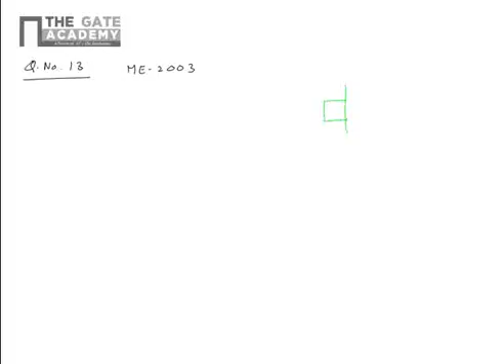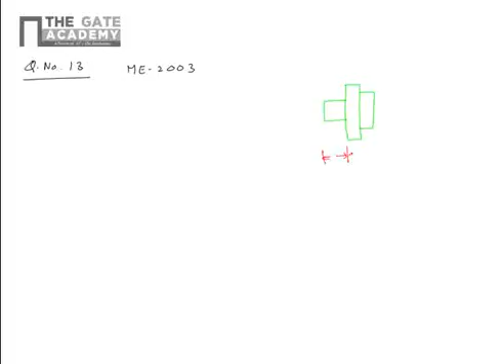A part is shown in the figure. He has given one diagram. So this is a diagram, it's like a coupling, looks like a coupling, with Q, W, R.

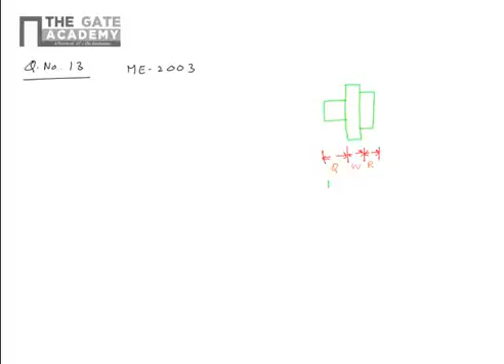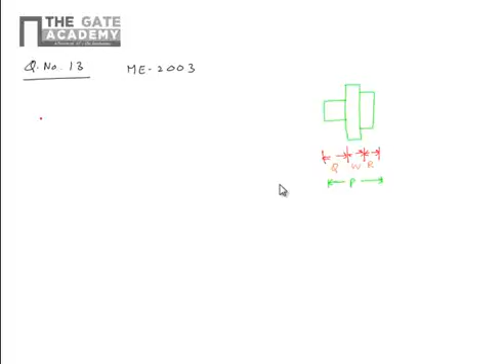This is P. So he has given P equal to 35 plus or minus 0.08 mm, Q equal to 12 plus or minus 0.02 mm, R equal to 13 plus 0.04 minus 0.02.

With 100% confidence, the resultant dimension W will have the specification. So we need to calculate the W dimension. So how do we get it?

First, maximum limit P max equal to 35.08. P minimum equal to 34.92.

So if you subtract minimum values of Q and R from P max, you will get maximum value of W, right? Subtract... suppose 35 is one thing.

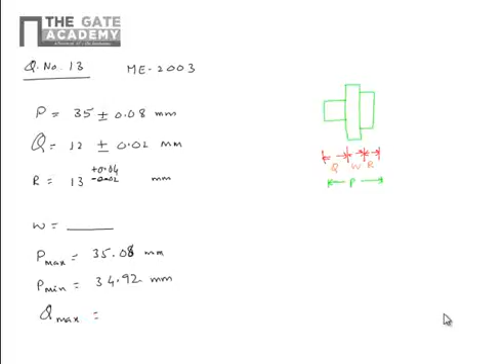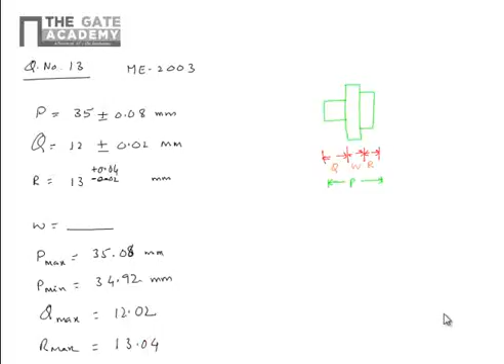Similarly, Q max, R max. So W max equal to P max minus Q max plus R max.

Similarly, W minimum equal to Q minimum, R minimum. So if you simplify this, you will get the option which satisfies 9.99 plus or minus 0.03. Answer is option A.

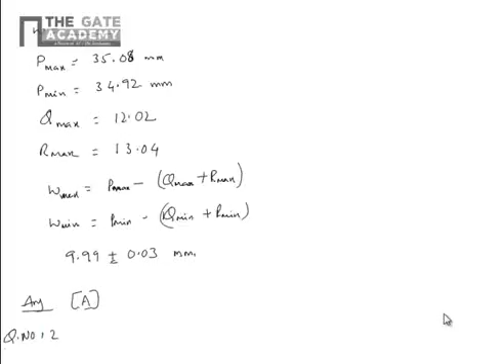Similarly, there is another problem on taper measurement. In 2010 they asked, question number 2, ME 2010. He has given a taper hole inspected using the CMM with a probe of 2 mm diameter at a height of 10 mm from the ground.

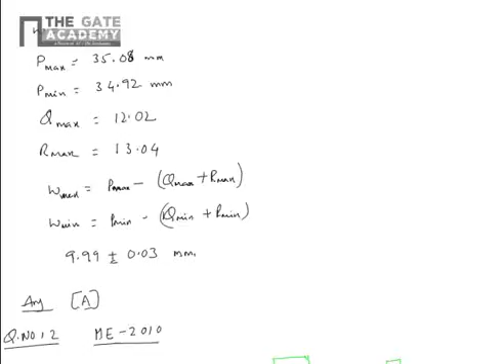From the bottom, 5 points are touched and a diameter of circle is obtained as 20 mm, and similarly 40 mm diameter at a height of 40 mm. The given problem is a taper hole, so it's a symmetrical taper. This is height z equal to 0, z equal to 20, z equal to 40.

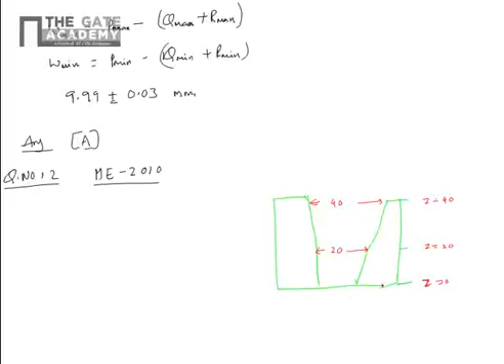So here diameter is 20, and here diameter is 40. What is the diameter at z equal to 0? That is the problem, so we need to calculate this one.

To get that, from similarity of triangles, we can calculate this way. I will draw it somewhat bigger so it's visible. This is what is the value of this? Similarly we can calculate this one. First theta, this is also theta.

This equals 40 minus 20 by 2, so that is 10. So first calculate theta, tan theta equal to 10 by adjacent side which is 20. So theta equal to tan inverse of 10 by 20.

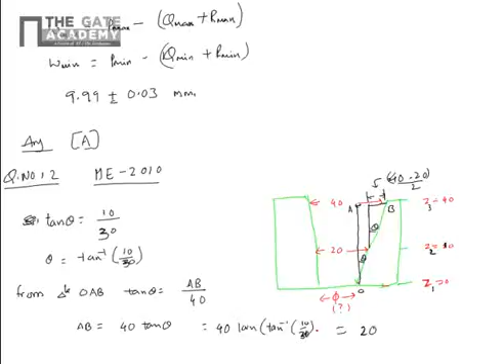Small correction, here z1 is 10, z1, z2, z3, so z2 is 10, not 20. So our formula will change, giving 30. So this value is 40 by 3, that is AB.

So if you want to calculate the diameter at Z, 40 minus 2 into 40 by 3 equals 40 by 3, that is equal to 13.3 mm. So diameter at the bottom is 13.3 mm.

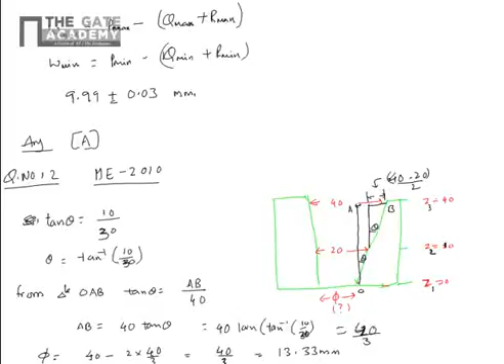So it's simple, you don't need to remember any formula, just use trigonometric functions and you can solve the problem. It's a 2 marks question, anybody can solve this. Next, screw thread measurement, the last topic.

In screw thread, the major diameter (maximum diameter) and minor diameter (minimum diameter) can be easily measured with normal vernier calipers and similar tools. But if you want to measure the effective diameter, you have to use different methods.

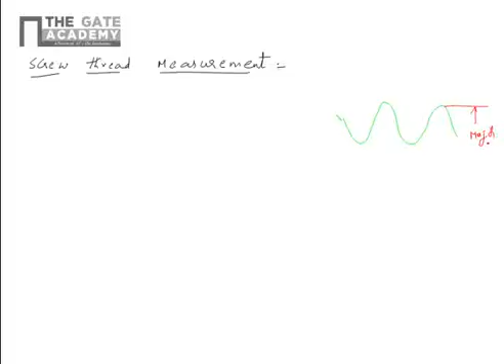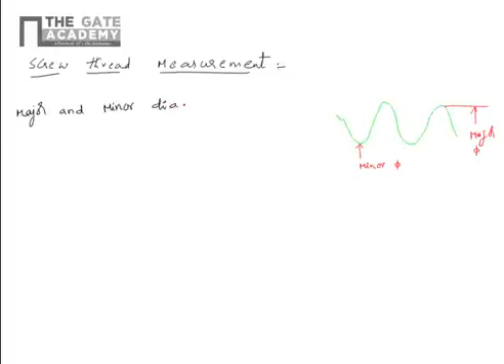So major diameter, this one is minor diameter. Major and minor you can easily measure using a bench micrometer and floating carriage micrometer. Major and minor diameters are measured using a bench micrometer or floating carriage micrometer.

Pitch of the screw thread is measured using a screw pitch gauge, tool maker's microscope, or optical projector. Pitch is the distance between two successive points in a thread. So pitch of screw thread is measured using screw pitch gauge, tool maker's microscope, any of this, or optical projector.

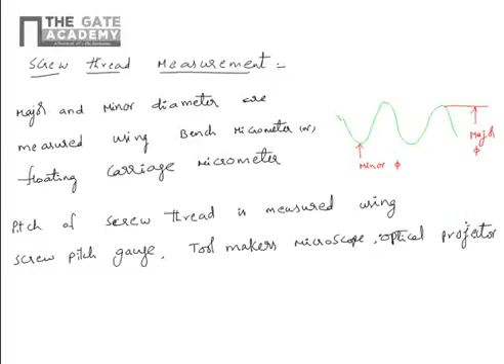Next, effective diameter. What is effective diameter? We know major diameter is the diameter measured at the addendum, and minor diameter is the diameter measured at the dedendum. So what is effective diameter? This is important: effective diameter is an imaginary diameter at which the thickness of the thread is equal to the gap between two threads.

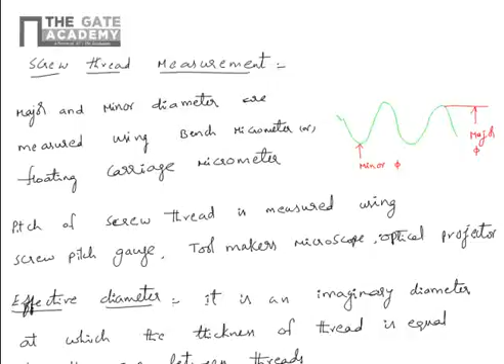Imaginary diameter at which the thickness of thread is equal to the gap between threads - this is called effective diameter. For example, in the diagram, this is the gap between threads, this is the thickness of the thread. At the point where both are equal is called the imaginary diameter.

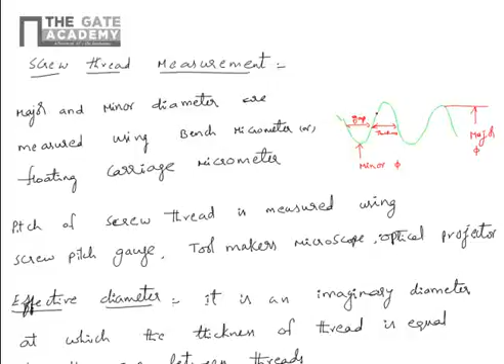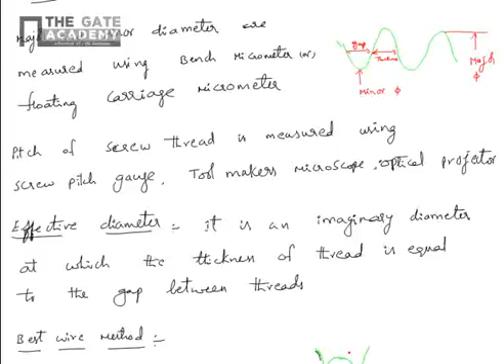How do we measure it? There is one method, the best wire method, used to measure the imaginary diameter. So for this, how to calculate the pitch or effective diameter using the best wire method, we need to calculate the best wire diameter. Here, this is the center of the wire and this is the touching point.

So if this is making an angle alpha, here also the alpha angle will be there based on the similarity of angles. I will draw it somewhat bigger so it's visible to you. So we need to measure the effective diameter, and for that we use the best wire method. So this is a diagram.

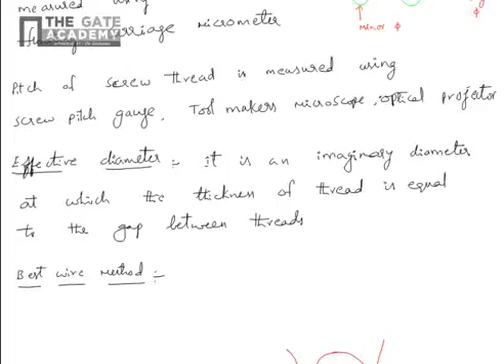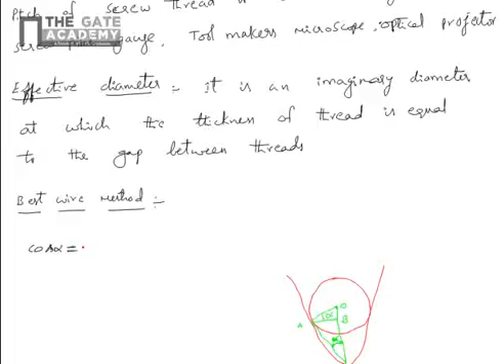This is the center of the wire, this is the angle. Based on the property of angles, alpha is the same on both sides. So this is center O, A, B, C. From the triangle, cos alpha equal to adjacent side AB divided by hypotenuse OA. So cos alpha equal to adjacent side which is...

P by 4, pitch by 4. Pitch is the distance between two successive threads. So if this is P by 2, half of that is P by 4. P by 4 divided by OA, which is the radius of the wire.

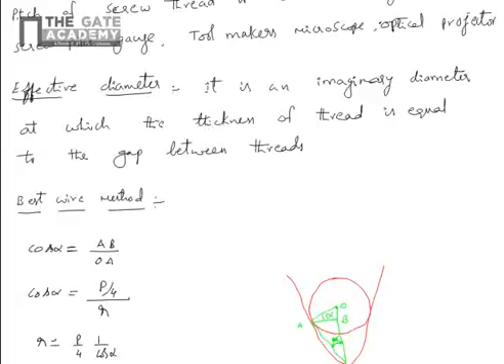R equal to P by 4 times 1 by cos alpha. Multiply by 2, you get diameter: 2R equal to P by 2 secant alpha. 2R is nothing but D, so D equal to P by 2 secant alpha, and D is the effective diameter.

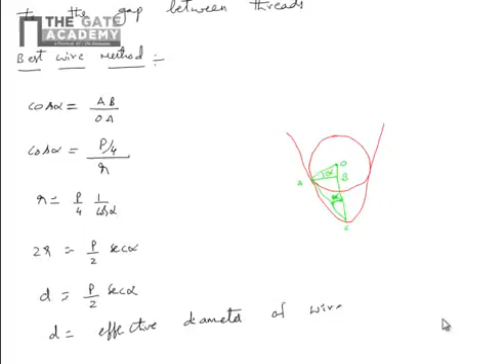Effective diameter of screw, effective diameter of wire, and alpha is the angle between the threads, and P is the pitch of the thread. So this is about effective diameter calculation, best wire diameter, and the effective diameter of the wire.

So in metrology you will get questions only on fits, limits, and tolerance - they rarely ask on other topics like screw thread measurements and gauge design. Gauge design is again similar to limits, fits, tolerance. So if you're clear about the calculation of limits, fits, and tolerances, almost 90% chance you can solve the question from metrology. There's very little chance they will ask a question outside of limits, fits, tolerance. Okay, thanks.